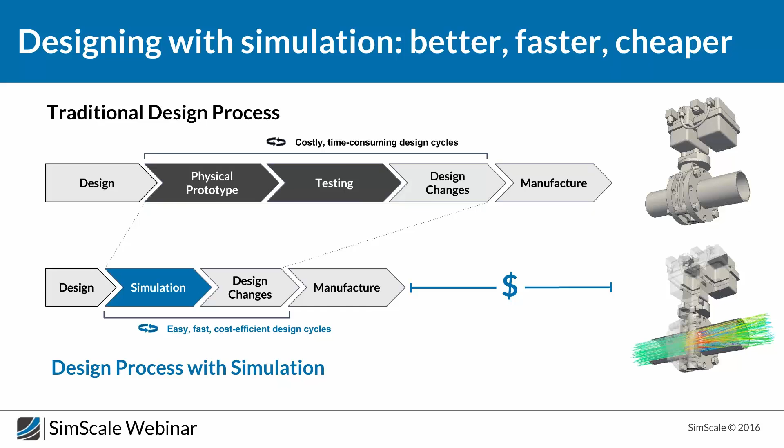So you now know the importance of using simulation, but why should you use SimScale for this? There are three important things that make SimScale a good choice: the first is accessibility, the second is cost efficiency, and the last is availability for everyone.

For accessibility, you don't need high-performance RAM, a graphics card, or any other special hardware, or even a big software installation in order to perform a simulation. Commercial software usually requires hardware or software installation, but you don't need any of that for SimScale. You just need a PC or laptop with a browser installed, and then you're good to go. You can perform high-performance computing on our cloud-based platform. All you need is an interesting idea, a CAD model, and basic knowledge of how to set up a simulation, and we can help you get through that.

Once you have an interesting idea, you can post it in the forum, and we can help you set up the simulation to get some interesting results.

The second point is cost efficiency. SimScale usage is basically free. Anyone can sign up to SimScale and start simulating for free. We have a concept of public and private projects. Public projects are accessible to everybody, so if you're a free user and sign up, you get access to all the free public projects. If your project is private, only you can see it and no one else can access it. So in that way, you can use everything for free.

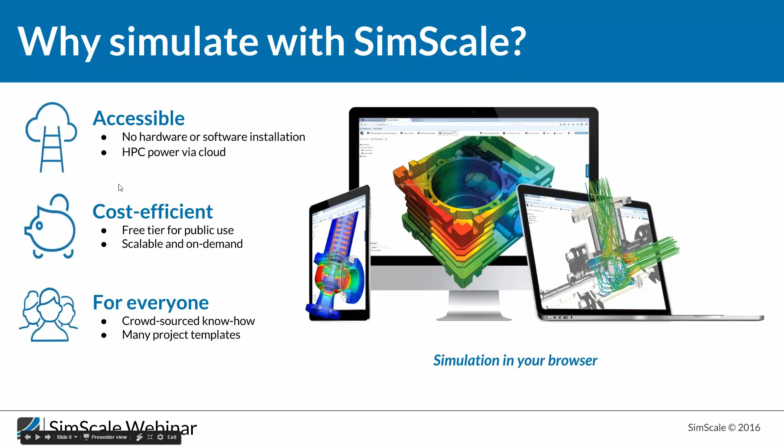And now the types of simulations: we have fluid flow simulation. So basically we have the different types in them: incompressible, compressible, multi-phase simulations, scalar species, and the one which is our focus today, the convective heat transfer, which is the buoyancy driven flow. In this case, we only have the fluid domain and try to simulate something on this fluid.

The second one would be the conjugate heat transfer, which has solid as well as fluid domains present. So in principle, you can simulate the interaction between the solid and the fluid domains. This is an advantage of using the conjugate heat transfer simulation. And there are many other advanced applications, say rotating machinery, porous media. In general, any of these fluid analysis types can be coupled with the advanced applications.

So in principle, you can use incompressible flow types with rotating machinery, porous media, and so on, say multi-phase with a 6 degree of freedom motion in the case of a boat floating. So you have air and water in a multi-phase simulation, and then you give a 6 degree of freedom for the boat. So it's easy to simulate, and all our CFD simulations are based on OpenFOAM and SU2 codes. Both of these are open source codes, and we use them to simulate the fluid flow analysis.

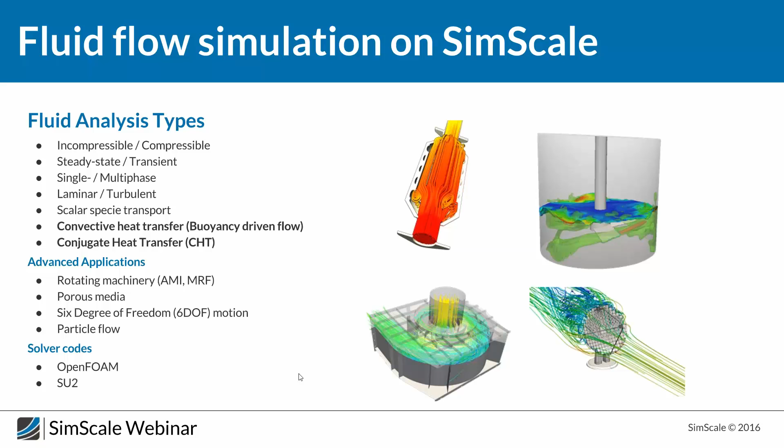And in the structural mechanics field, we have again various analysis types: static, dynamic, frequency, modal, and so on. But our interest today would be thermomechanics, which has heat transfer and uncoupled thermomechanical simulations. In heat transfer simulations, the temperature changes in the solid due to any heat transfer changes, but uncoupled also includes stresses due to any pressure loads and so on. So it includes the stresses induced in the solid due to both heat transfer and pressure loads.

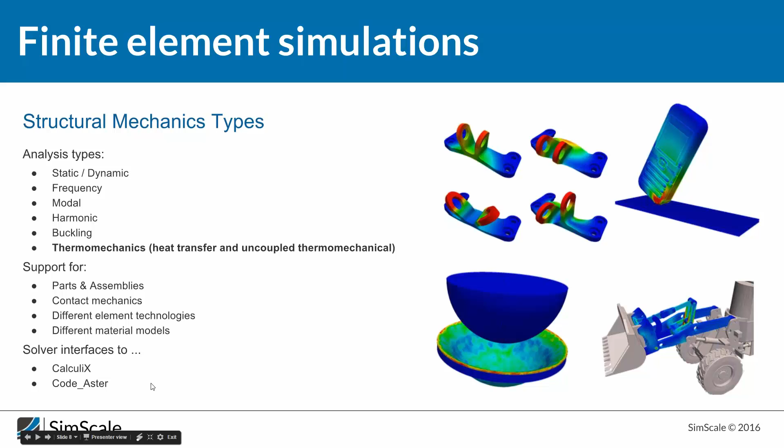And the structural mechanics solver supports all of these, contact mechanics, parts and assemblies, and so on, and we use CalculiX and Code_Aster as the solvers. There are other capabilities as well using SimScale, like discrete particles and acoustics, but these are not our concern for the day, so they might be useful for you if you would like to simulate any other cases.

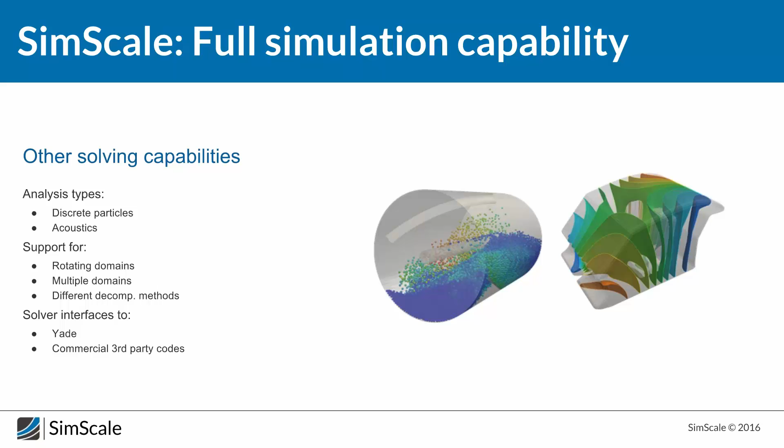Okay, now after having a short introduction about SimScale, let's dive into the topic. There are three basic heat transfer phenomena. As I told you earlier, they are conduction, convection, and radiation. To start with conduction: the term is defined for heat transfer between substances which are in contact. So if there are two bodies in contact, then conduction comes into play. Or it can even be a single solid which has a different potential, say one end at a higher temperature and the other at a lower temperature. So heat conducts from the high end to the low end.

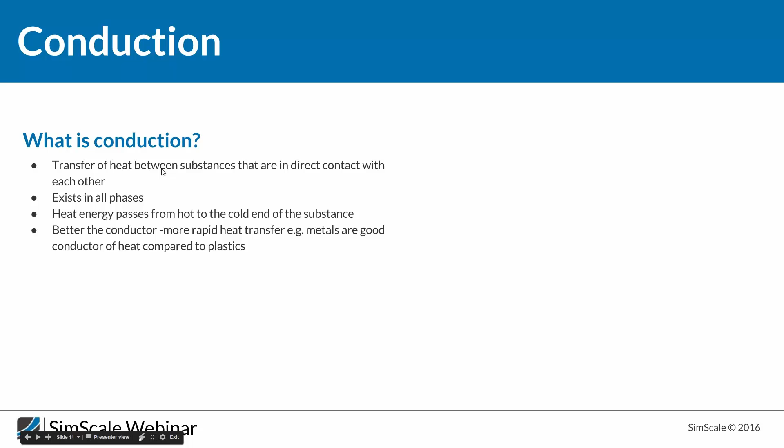This is predominant in solids, comparatively less seen in liquids, and seen least in gases. It exists in all the phases, but it is least existent in gases. This takes place essentially because of vibration in particles. In solids the particles are tightly packed, so when there is vibration, it gets transferred to the next particle. But gases are loosely packed, so even if you have a vibration, it doesn't affect the surrounding particles so easily. That is why the conduction effect is comparatively less in gases than in solids.

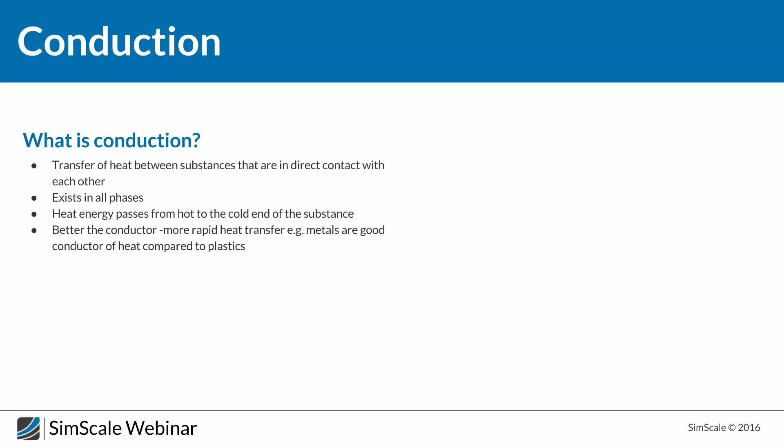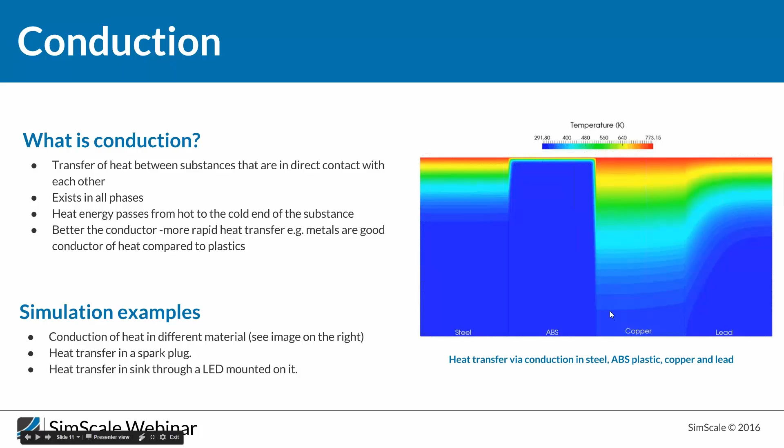And this is an example of conduction using simulations. Basically you have the heat transfer in a spark plug in an automobile. Heat is transferred from one end to the other because one end is always heated when the vehicle is running. And then you have heat transfer in a heat sink through an LED. And this is just the test case which I'm going to show you today. We are heating the top and the bottom end is kept at room temperature. So for different materials, how does heat transfer take place? This is a simple example.

And next we go to convection. Convection is one where the heat transfer is achieved by particle movement. It's a characteristic of fluids, so essentially it's liquids and gases. I would say a typical example of this is in winter season, you feel cold because of convection. So the air around you removes the heat from your body. So this is a simple example of convection, and this is done naturally.

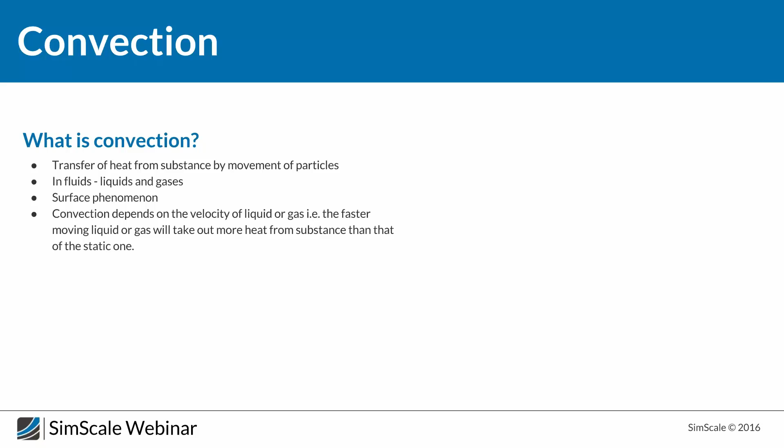In principle, you can get the required heat transfer or temperature if you artificially or intentionally blow air over something. So I can just show an example. So in this case, it's a data center. Obviously, this is a much reduced model, so a real data center would be much more complicated. We just show you how a convection simulation works in a data center.

So when air flows over here and you try to blow air into the domain with a particular velocity, and then you have heat in these surfaces. So these are the heated surfaces because of the server vents being heated. So the air which comes in, cold air which comes in, actually takes away the heat from the surfaces and goes via the outlet. So you can control the amount of heat being taken from the surface using the velocity.

So this is, as I told you, a case of forced convection, which can be used for various heat transfer applications. And even in this case, the heat transfer is directly proportional to the difference in the temperature. So here it is the temperature difference between the surface and the ambient. So the surface temperature minus the ambient temperature is proportional to how much heat transfer would take place.

Another typical example would be room heating during winter. So you turn on the heater and the hot air tends to move up, and this is one other example of convection in a room.

This is evident from the formulation of radiation. In the previous two cases, the heat transfer was directly proportional to the temperature difference. But in case of radiation, the radiated power is proportional to the difference between the fourth power of temperature. So you have, say, something like this. This is a simple case of radiation. I would explain this later because this is as well our trial case. I would explain the significance of the results later,

but you know that this is a hot surface and this is the ambient. So the temperature at the hot surface to the power 4 minus the temperature of the ambient to the power 4. So that makes a huge difference since it is to the power 4. So when the difference between the surface and the ambient is high, the difference is going to be very high. So that is why this is most evident at higher temperatures. And there are various examples of it. So when you have a highly heated plate, radiation takes place in it.

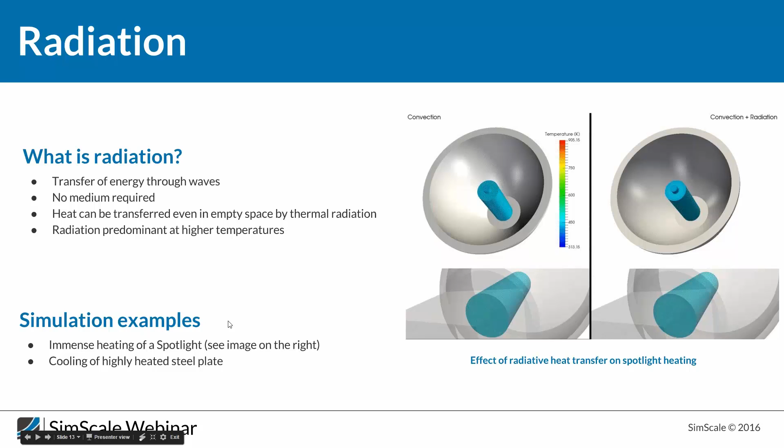Now, the general thermal simulation types. So we assume a simple case, say a flow through a pipe or a rectangular cantilever beam. So one for a fluid simulation and one for a structural simulation case. So if we know the dimensions of all of them, it is possible to find analytical solutions using the partial differential equation. So we have the simple geometry, we use the simple formulae and then try to derive the results. What is the bending moment, how the flow would be, and so on.

But what if we have a complex geometry? In this case, it would be hard to use our usual formulation. So we discretize the domain into small geometrical shapes and then try to apply these governing equations for each of the subdomains. This process is called meshing or discretization. So we are dealing with thermal simulations, which are structural as well as fluid, and we use two different approaches for this. One is called the finite element approach and one is called the finite volume approach. Now we would have a short discussion about what each of them are.

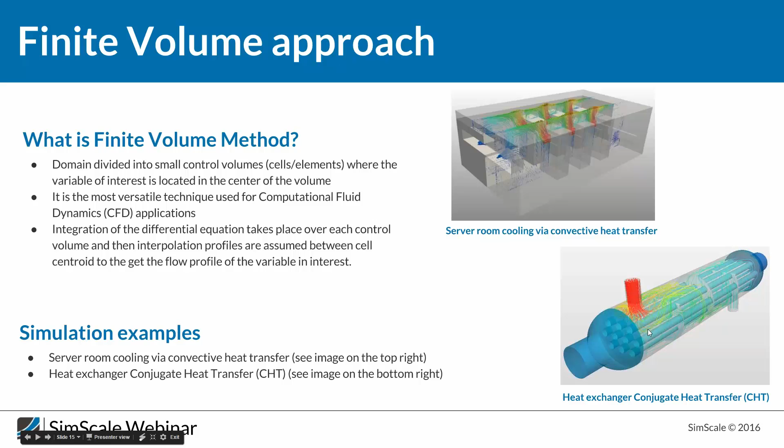And this principle is usually applied in CFD applications. And interpolation between different cells takes place at the centroid of the cell. So this interpolation is required to find the solution for the entire flow domain. And as I told you, it is used in CFD applications. So in convection problems or CHT problems, we use this finite volume approach.

And the next one is the finite element approach. So in this case, again, the domain is divided into smaller volumes, but the variable of interest is located in the nodes of the volume. Nodes are the corner points of each cell. So this is a tetrahedral mesh, so for every small cell there are 4 corners. So all values such as stress, displacement, everything is stored at all corners of the cells, and these are used for interpolation between the nodes, and they are most commonly used in structural mechanics applications.

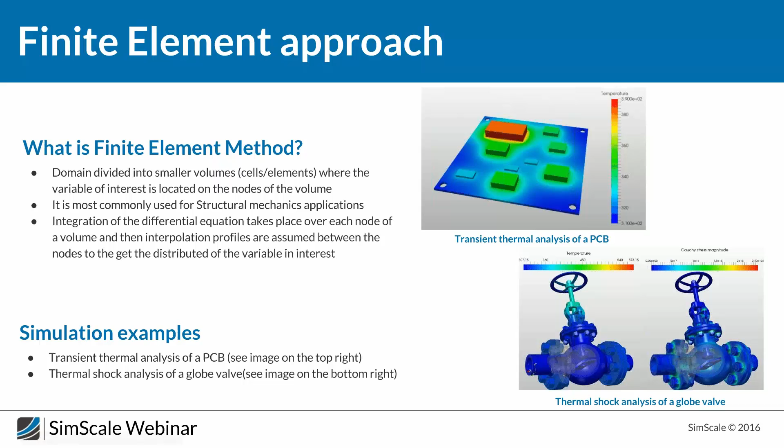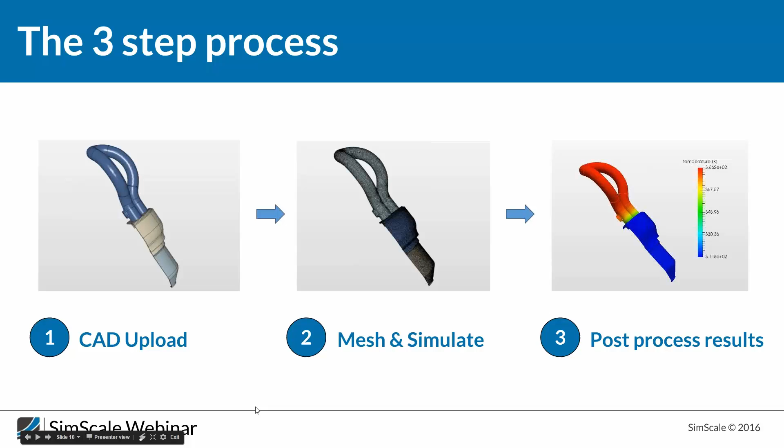So now, using the SimScale platform to simulate, as it says, it's a three-step process: you upload the CAD model, then you mesh and simulate it, and finally you post-process the results. From the basic overview it looks simple, but let's see how this works.

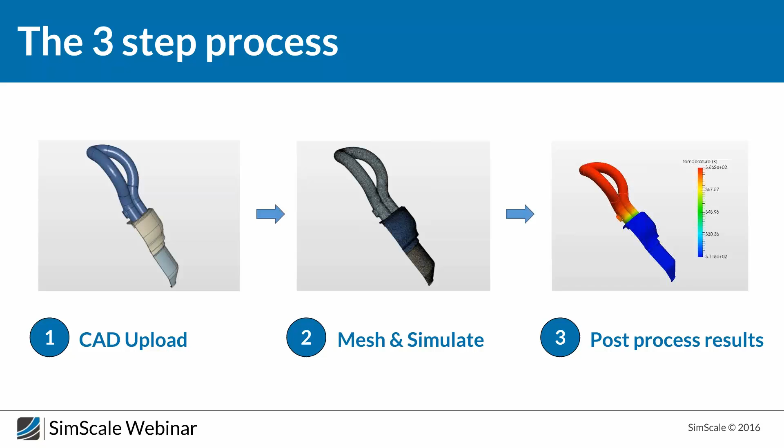So we have 4 case studies. The first 3 are just for study purposes, and the fourth one is a real world case. The first one is with just conduction. The second case is with convection as well as radiation, to show the difference between convection and radiation. And the third one has a spotlight heating. A spotlight is a lamp, so it is being heated, and what if it has only convection, and what if it has convection as well as radiation? So how does it work?

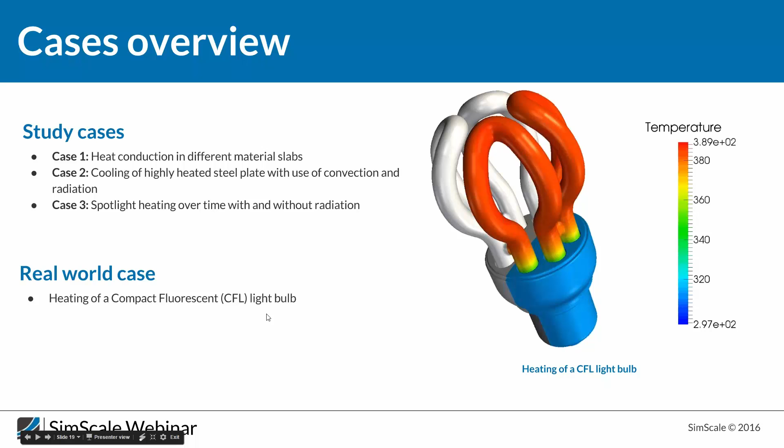And the real world case is a CFL, the bulb, and in this case we only take convection into consideration, and probably conduction between these two. So we quickly go through a live demo on the platform.

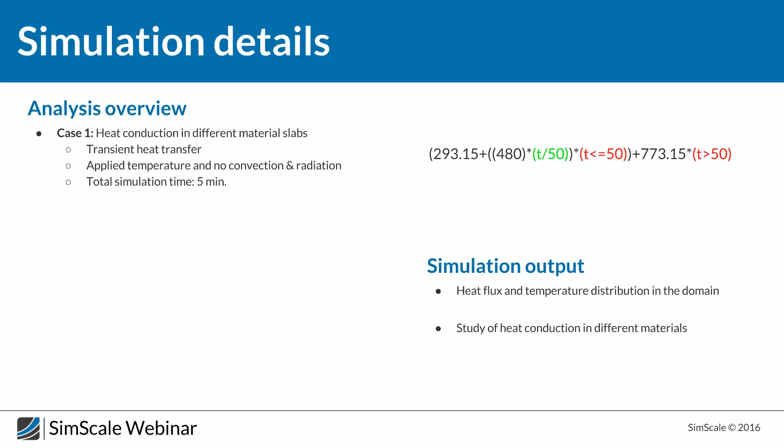So the first case is just conduction, which is a transient heat transfer analysis, and I'll be telling you what a transient analysis means. We apply temperature and no convection or radiation at all, so it's just conduction here. We simulate it for a total of 5 minutes physical time. The output we expect is the temperature distribution in the domain and the heat conduction in different materials.

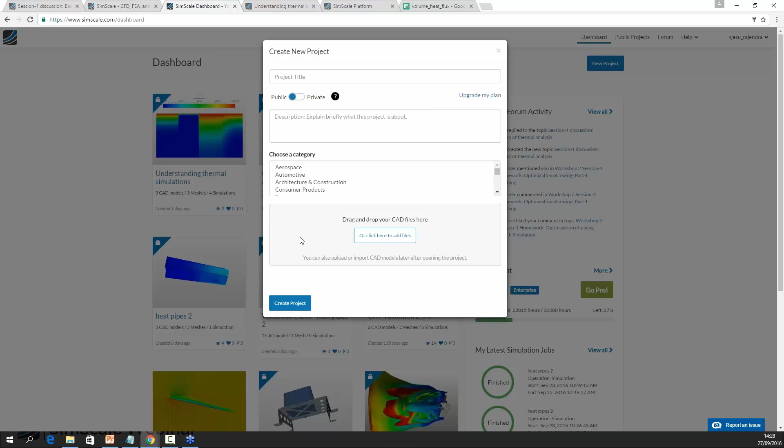Now this is what I mentioned at the beginning of the session, having a public or private project. You can have a private project only if you are a customer of SimScale. Otherwise you can create a public project. In this case, I already have my projects, so I'm just going into them. Once you click it, you have the project open. You have the project overview window, and then just click to open it.

Okay, so now I'm going to show you the example of conduction, which is multiple slabs. So here we have 4 slabs. We have 4 because we want to assume different materials for each slab and analyze how conduction takes place.

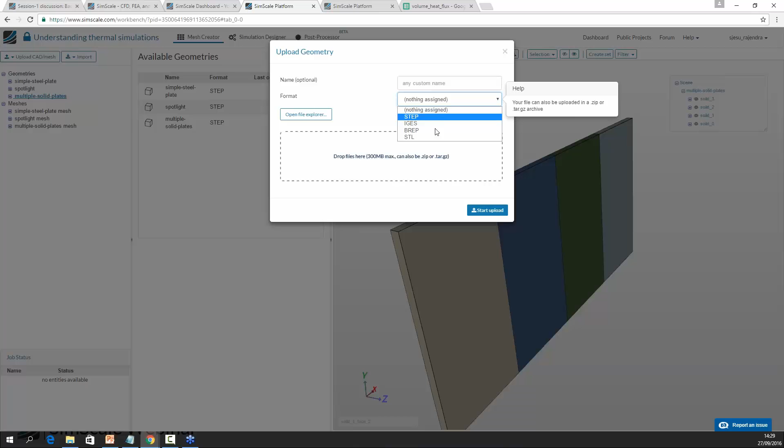So this model was done using a CAD software, and you can either import the model in any of these 4 formats into the platform, or you can also use the import from Onshape. Onshape is an online CAD software, just like SimScale is for simulations. So you can log in here, create a geometry, and then directly import it from Onshape.

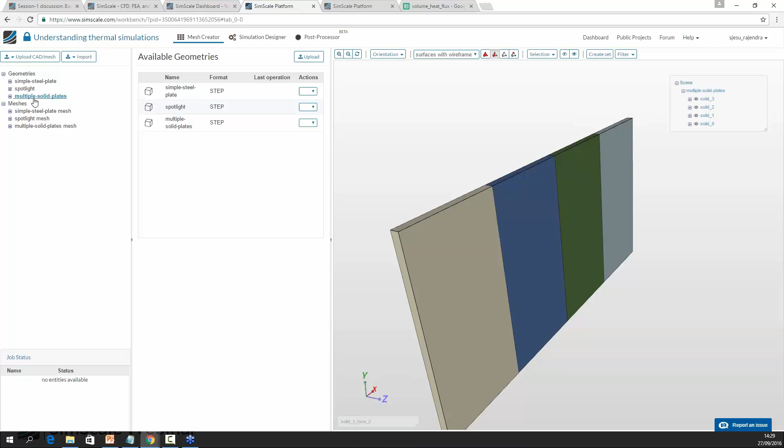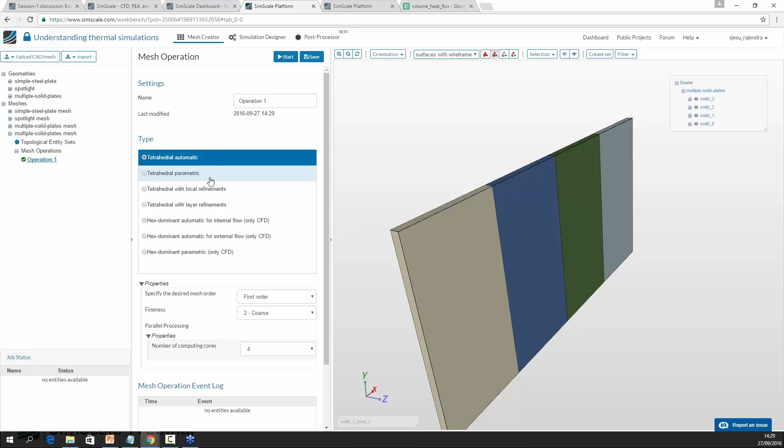So to start with a mesh, select the geometry which you want to mesh and click on new mesh. So right now we have only 3 meshes here which are already created. So I just want to show a demo of how this is being done. So once you click on that, you have a 4th one created, and you can select any of these mesh types, and you can go through the documentation as to how you can choose among these. So for this particular case, we use a tetrahedral parametric mesh.

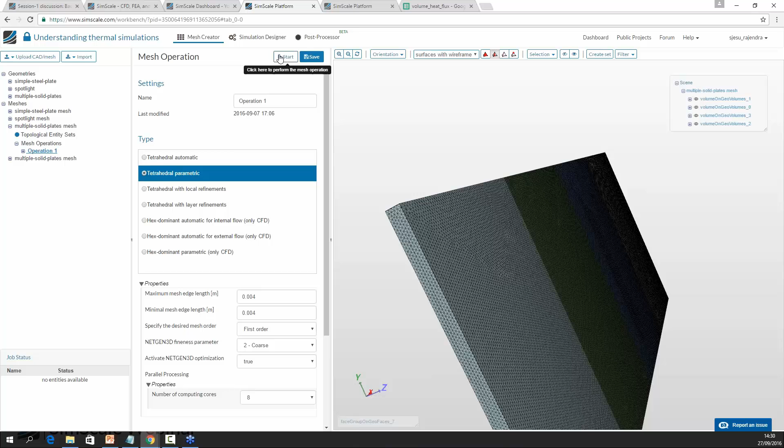So after meshing, it looks like this. So we discretize into small domains. In this case, we use something called a parametric mesh, which is kind of a manual mesh. We try to define the edge lengths here so that we control how many cells we want or the length of the edge which is required. And then you just mention the values and click on start to start the operation. And this would not take long, probably less than 5 minutes to generate this mesh.

So once this mesh is generated, now you can go to the simulation designer. So in SimScale, there is one thing which you have to remember. As simple as that, it's always either left to right or top to bottom. So on the top tabs, you go from mesh creator. Once you're done with the mesh creator, go to simulation designer. Once you're done with the simulation designer, then to post processor. And here top to bottom, so from geometry to mesh, and even in mesh, you go one by one.

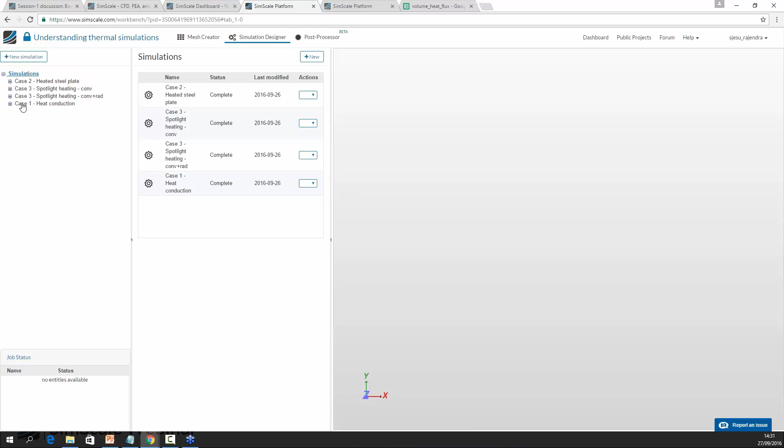So here you don't have many options, but when we switch to the simulation designer tab, you have many options, and you can just go from top to bottom, step by step, in order to set up the simulation, and it's quite easy for you to understand. Now, going into the simulation designer tab. So this is our case for conduction. In order to create a new simulation, click on new simulation and then choose the required analysis type.

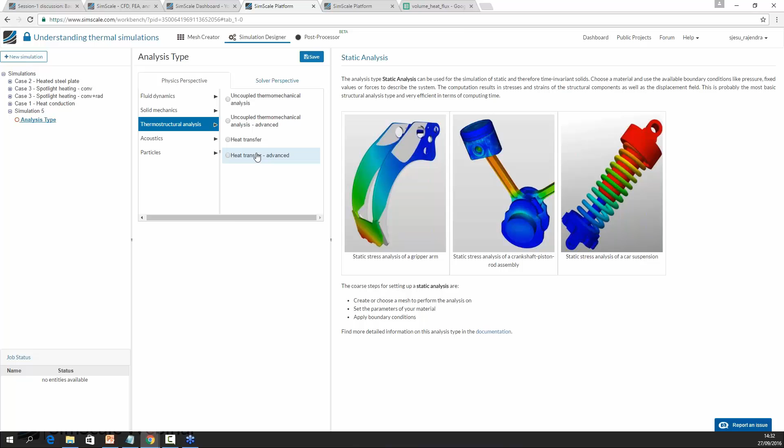In this case, we will be doing a thermostructural analysis, so you can use either one of these. And for this particular heat conduction application, I'm going to use Heat Transfer Advanced. Heat Transfer Advanced allows us to use something called manual time stepping, which I'll tell you about at the end of the simulation setup. So that's the main reason why we use this advanced solver. But for the rest of the simulations, we'll use the regular heat transfer analysis type, because auto time stepping would be sufficient.

So once you press this and then click the save button, as discussed in the problem statement, it is going to be a transient heat transfer analysis. So what is a transient heat transfer analysis? If you want a time dependent solution, then you go for transient analysis. A steady state analysis gives you the final solution at, say, infinite time. So after all the heat transfer takes place, what is the final temperature distribution in the domain? That you can see from the steady state solver. But if you would like to know how the temperature changes as time progresses, then you go with transient simulation.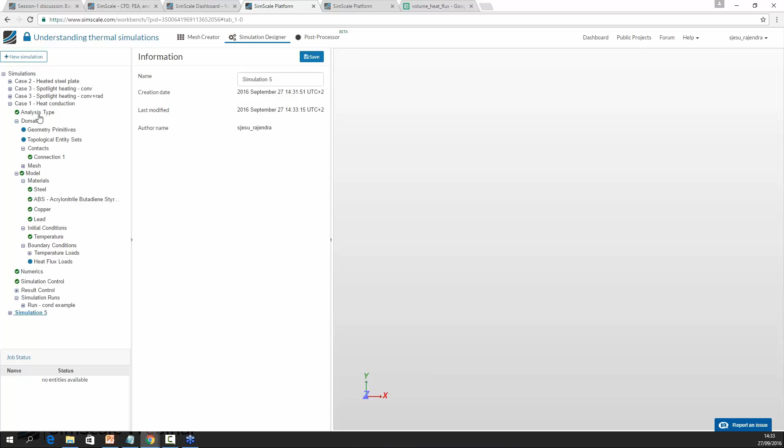And then once you click the save button, the simulation tree is automatically generated. In this simulation tree, the red buttons are mandatory fields, and the green ones are successfully assigned. If it's a blue one, it's an optional field. You can leave it empty and it doesn't matter, either way your simulation would run successfully. We have already set up the simulation, so I'll show you a demo on this one. As I told you earlier, it's heat transfer advanced and transient type. And then we go to domain.

So domain, one advantage with SimScale is that I told you we'll be doing three types of analysis, but you can have all the three types in a single project. So you have the geometry of all the three and the mesh of all the three in a single project. And then you can even have the simulation of all the three under a single project. So you can have multiple simulations, which are completely different types, completely different meshes.

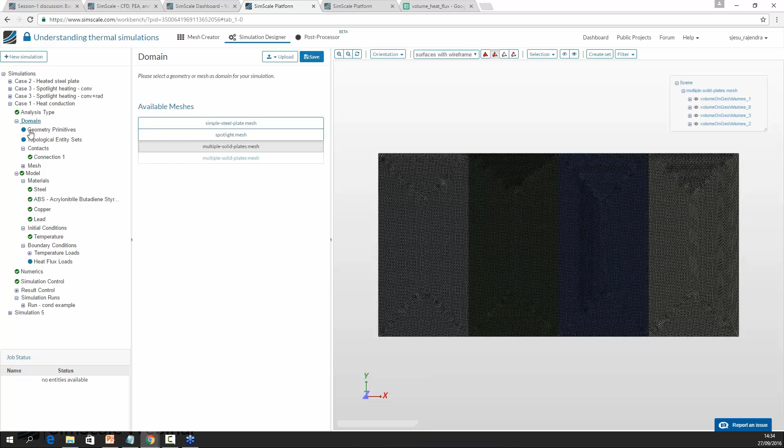So for this corresponding simulation, you assign the mesh. So in this case, it is going to be the multiple solid plate mesh. And then it is up to us to define the topological entities. This is an important aspect if you would like to group your entities for assignment. Say you have 4-5 surfaces on which you collectively have to give a condition.

Then you actually click those surfaces and then select new from selection and you give it a name and it automatically appears here. So when you go for any assignments later on, you just have to select this and then give the condition, and all of these faces are automatically being assigned with that condition. So that's the advantage of using a topological entity set.

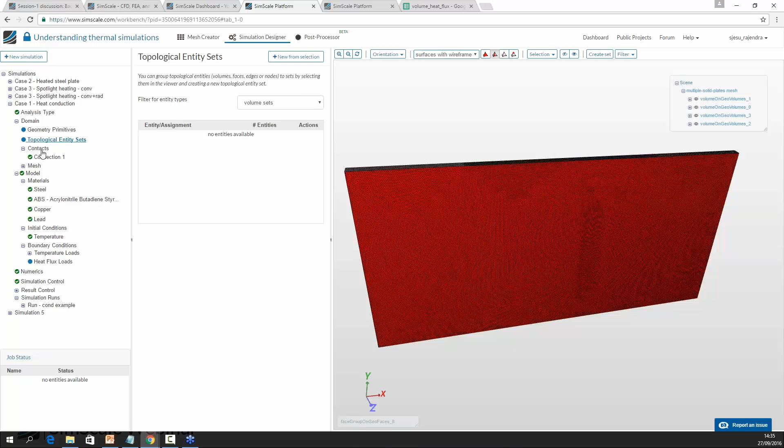So contacts in this case are essential because we have 4 different solids. As you can see here, they are completely different solids, so we need to tell the solver that there is a connection between each of them. So we define something called a bonded contact. When you select them, you cannot see them right now because it is this surface which is in between them. So what you can do is you can go to selection and click on isolate.

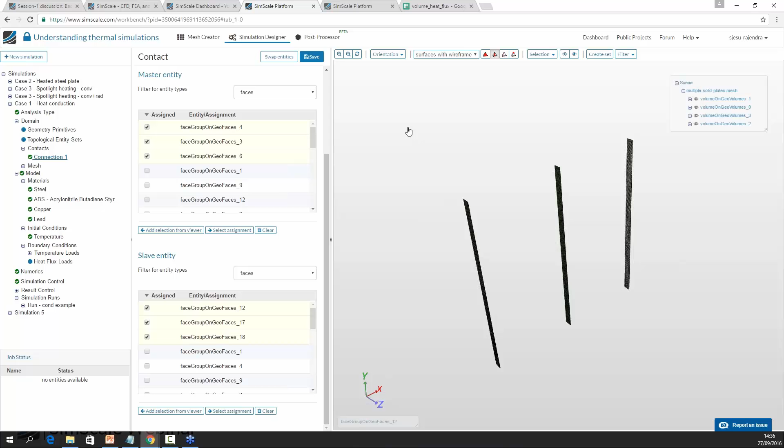So here you can see the master entities, and again you can see the slave entities. In this case it is going to be the same. You wouldn't see the difference, but in principle they belong to different solids. So previous time the master entity was from the face of this solid and the slave entity was a face of this solid. So now you can see the difference.

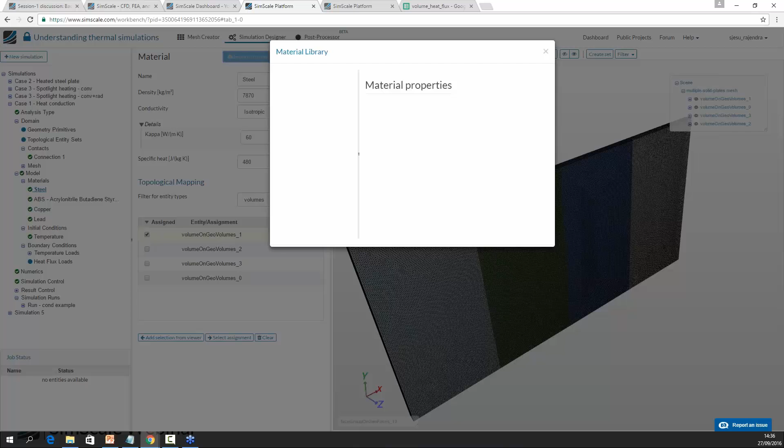And then you now set up the materials. So first you define a steel. You already have a material library from which you can import the material, a list of materials. So you can just select the material, click save, and you automatically have it here, and then you assign it to any particular volume here. So in this case, steel is assigned to this volume, the first one,

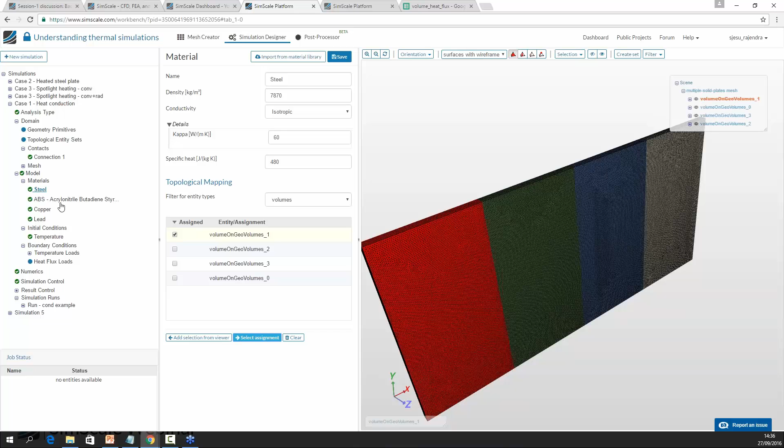and you have acrylonitrile butadiene styrene. So this is a plastic material, and this is being assigned to the second solid. Copper is being assigned to the third one, and lead to the fourth one. Each one has its own material properties, and the most important property for conduction would be here. The kappa would be the thermal conductivity, which is the important parameter for the conduction problem.

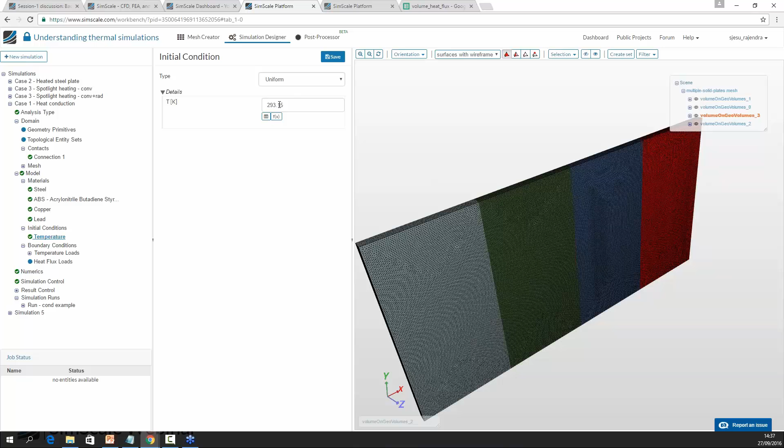So we define an initial temperature. As I told you earlier, you always go from top to bottom. It makes things much simpler and easier. Top to bottom. So now going to temperature, you define a room temperature of 20 degrees Celsius to the whole thing, just an assumption, and then you create boundary conditions. So here we say there is a temperature load on these faces, and the temperature load is given in terms of a function.

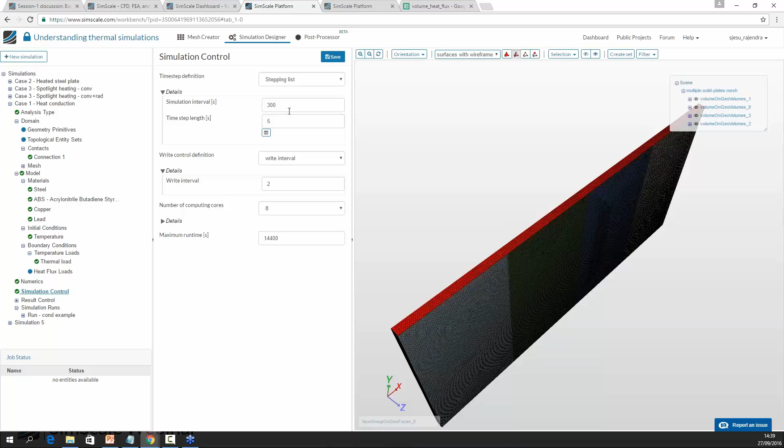And then here we use the stepping list, and this is why we actually used the advanced solver. So here we actually force this time interval, and that's the reason for using the advanced solver. And then you create a new simulation run. Once a run is created, you just select the run and click the start button, and it automatically starts running.

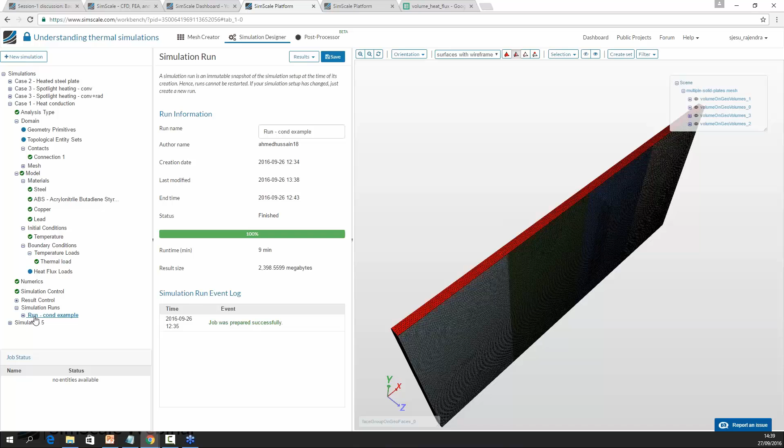Now we have to go for the next one, which is the post processor. If you want to get the result for the corresponding simulation run, you can just click here on post processor results. You are directly redirected to the solution field of that particular simulation run.

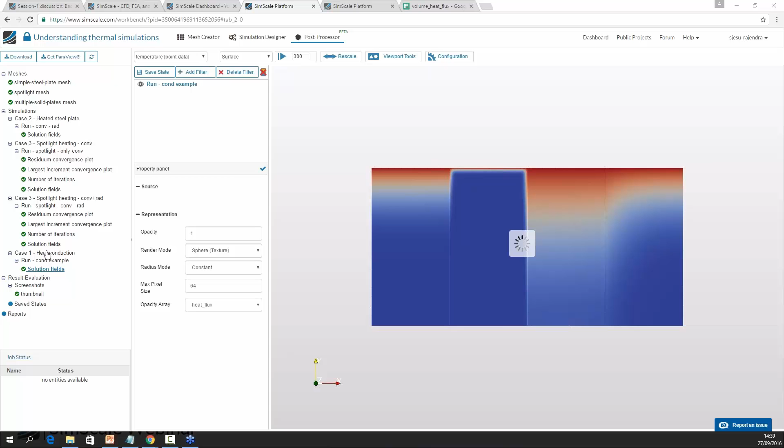So you can see all the simulations here. You have the possibility to view the mesh as well, and to save screenshots or saved states, so you can come back later again to view it. Here you can see the temperature distribution in the whole domain, and we would be discussing this later in the session.

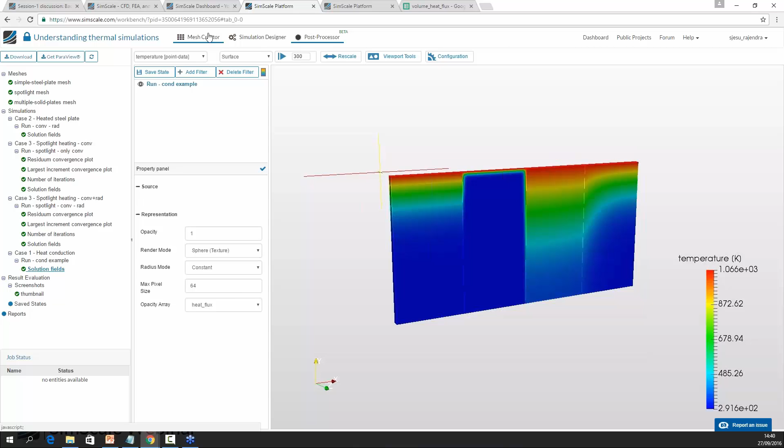Right now I would be showing you the subsequent convection as well as radiation models. So the second one would be convection and radiation. This is going to be a steady state analysis which involves convection as well as radiation, and since this is a steady state analysis, it doesn't really matter how much time you simulate it for, because you only get the end result, so it is just for 1 second.

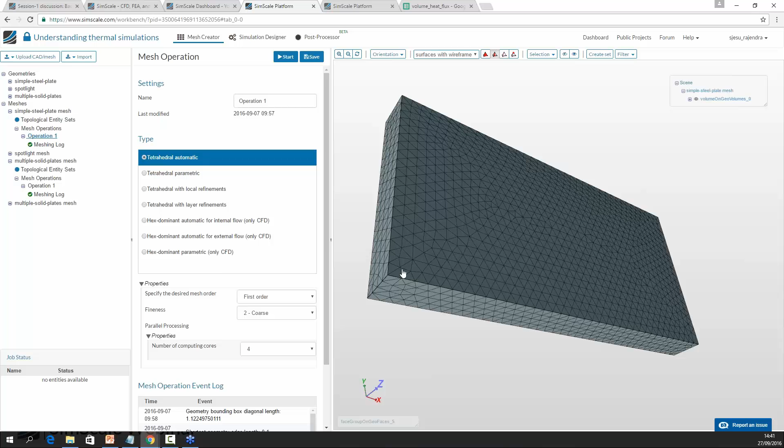In this case you have this, it's just a rectangular plate, and to mesh it we just use an automatic mesher. An automatic mesher, depending on the geometry, automatically calculates the edge length. Previously we used to give a value, but in this case it just calculates a value automatically and then meshes the domain. So now we go on to the simulation setup.

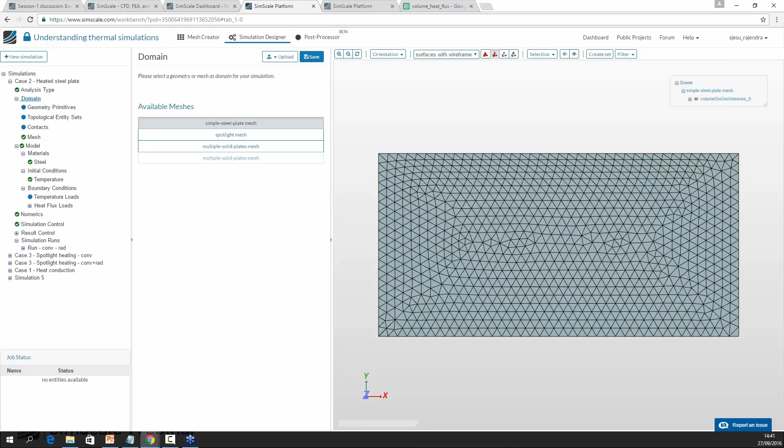The same thing as I told you why we use heat transfer. Here we don't have contacts because it's just one solid. We select the particular domain and then we assign steel material to it. The initial temperature is 30 degrees Celsius, which is 303 Kelvin.

And now comes the load part. So we say that we apply a 1000 watt load to the complete volume. So the volume dissipates a load of 1000 watts, and depending on the volume we give the value as this, 20,000 watts per meter cube.

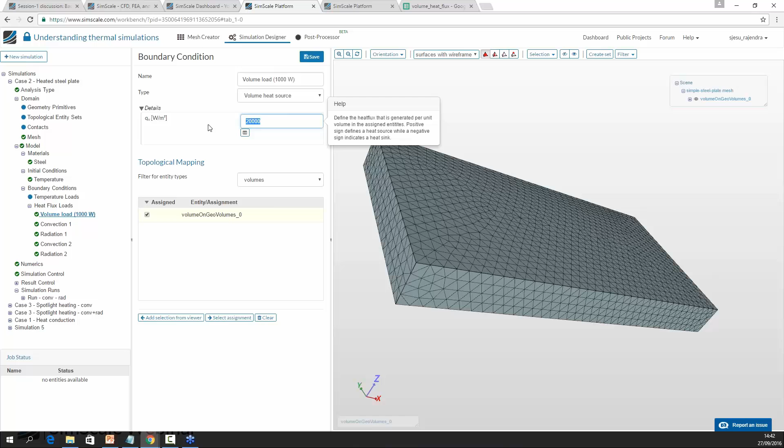So now we define a convection here, convection with a heat transfer coefficient. The characteristic of a convection simulation is a heat transfer coefficient. This decides how much heat transfer would take place. So this is one case. In the second convection we give a value of 50, just to see the difference as to how a 5 and a 50 surface reacts.

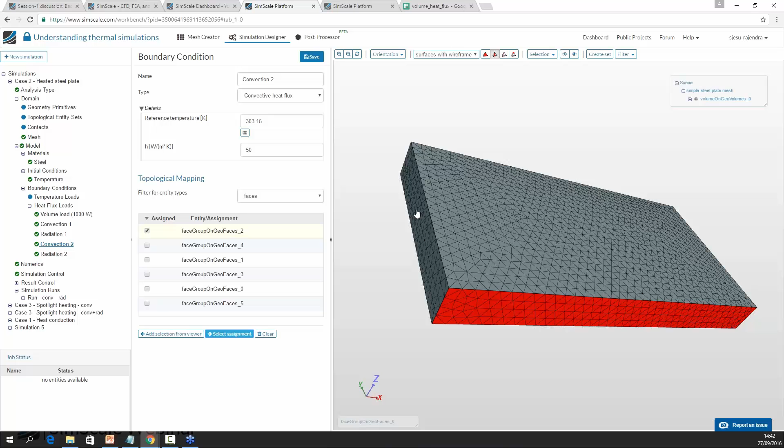On the other hand, we have radiation defined on the other two faces. Radiation with an emissivity of 0.9 and the other one with an emissivity of 0.1. So what is this thing called emissivity? It's a characteristic of radiation. If emissivity is equal to 1, it is called a black body, which can take up radiation completely or give out radiation completely. It's like it completely dissipates the heat. An emissivity of 0 reflects everything, it accepts nothing. For example, you can assume a shining surface - that's an example of an emissivity 0 surface. And for emissivity being 1, a completely black surface or a rough surface is a good example.

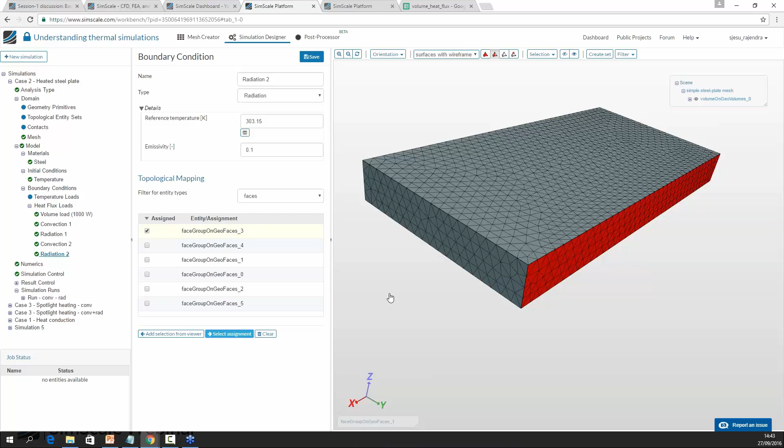So we define this case and create a new simulation as the previous one and then run this again. We would see the results of this as well at the end of the discussion.

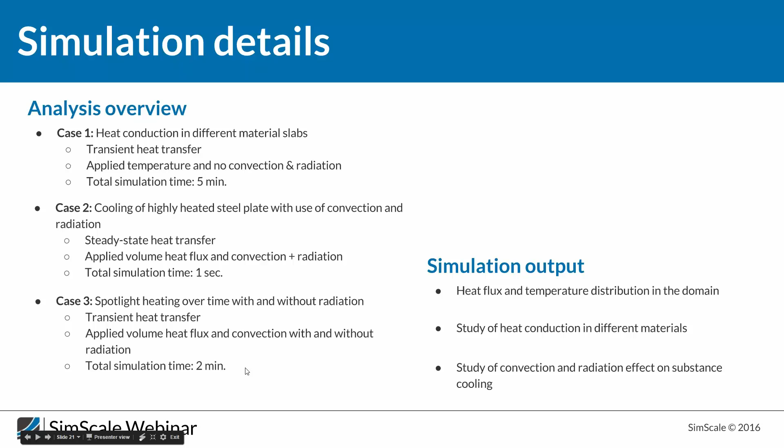And now we go to the third one, which is the case with radiation, like how radiation affects. This is also a transient heat transfer simulation run for a maximum time of 2 minutes, and a volume heat flux is applied to the body. So in this case, this is going to be the geometry. It's a light bulb where we have something over here which is circular, but then it's computationally expensive to include that and simulate, and it is of no physical relevance. So in principle, we only simulate this.

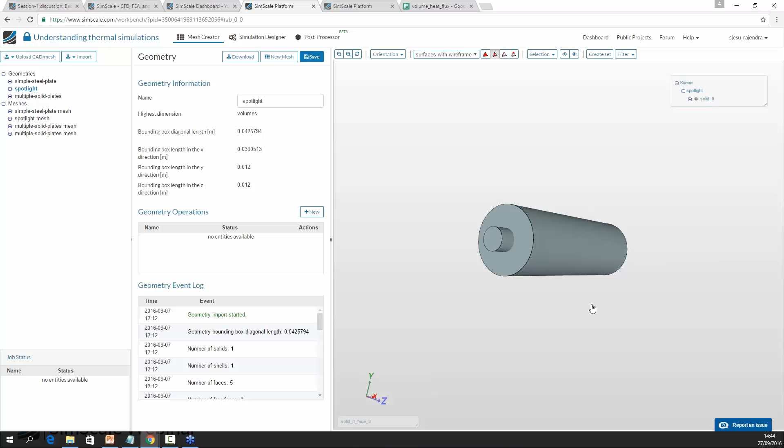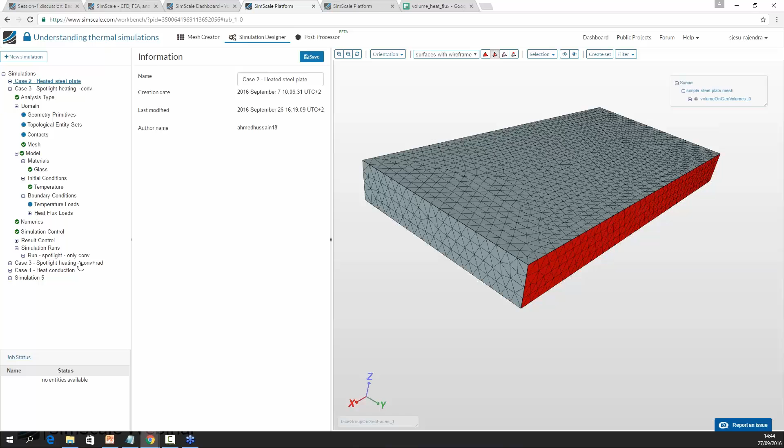And again, we create an auto mesh over this. Going back to the simulation: one case, we only define a convection over it. The next case, we define a convection and radiation over this one. So we choose the heat transfer analysis type to be transient. And now, since this is a light bulb, we define glass material to this one. Here comes the part - so we define a volume heat flux to this.

For transient simulations, keep in mind that this is kind of sensitive. If you directly give the maximum value to it, there's a possibility that the solver could crash. So what we do is we ramp the value. We run it for 2 minutes, but the first 10 seconds the heat rises slowly and then it's constant - so essentially in this region, it is going to be constant. But how do we do this? We just create a table where you have the time and the volume heat flux, and then save this as a CSV file, a comma separated value file, which can be uploaded here.

So only CSV files can be uploaded here. You can look into the documentation for more details on uploading a CSV file.

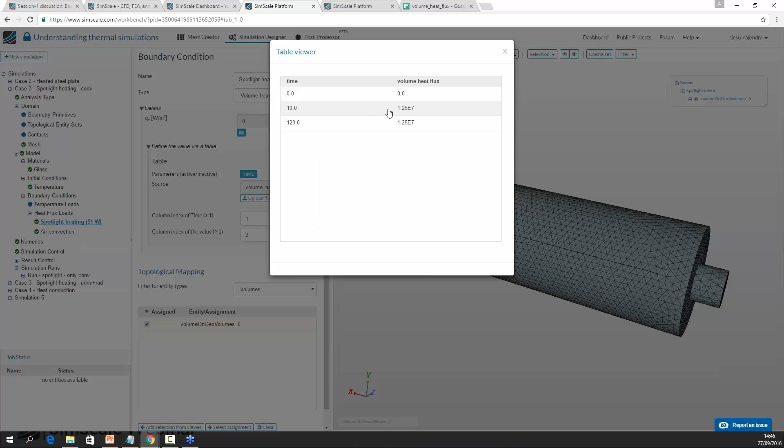So we give this value, which corresponds to a 51 watt power, and convection is defined in all the surfaces except this one, because this is connected to the other shining surface above it.

Now we simulate this case, and in the next case the only difference is that everything is going to be essentially the same, but we also have radiation defined on the same surface as convection. So we only have this difference.

And we now try to find the different solutions, and before that, the real world case as well. So now we consider a CFL, and this is a steady state heat transfer analysis with a volume heat flux defined, and since it is steady state, we only simulate it for 1 second.

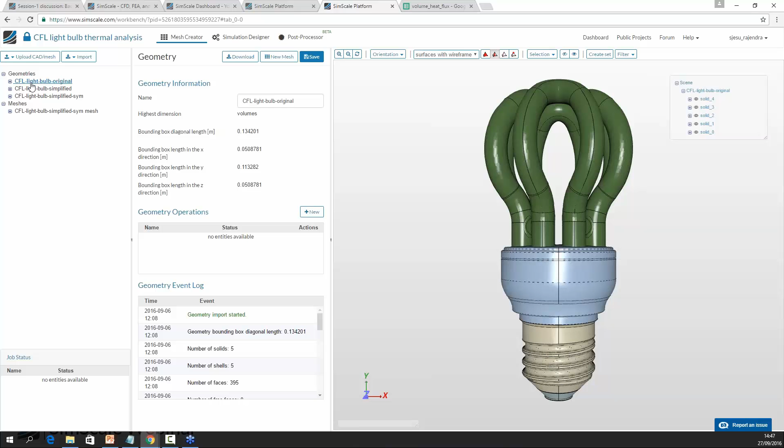So this is the original bulb, and the most important thing people should keep in mind is that simulation is kind of tricky. It's always best to break down things into simpler parts. If you have a very complex model with difficult or multiple boundary conditions and you get an error in the simulation, you really don't know where the error occurred. So what can be done is you simplify into small steps, or use a reduced model, and slowly increase the complexity step by step to get the final results. This way you can actually know where you're committing a mistake or where the error comes from. So in this case, this is the model.

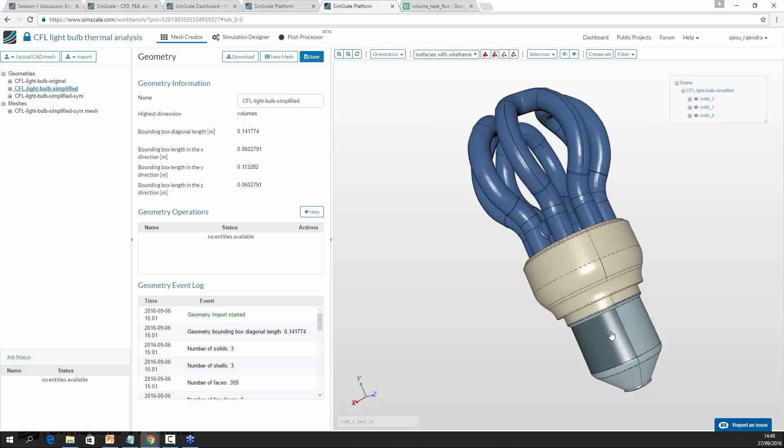This is a model from GrabCAD, from one of the users there. So now we simplify it. In the threads, I believe they don't contribute so much to the heat transfer, so we try to neglect them and simplify it. Another advantage is that we take advantage of symmetry, so since it's going to be the same everywhere, we only take 1/4 of this model and simulate this.

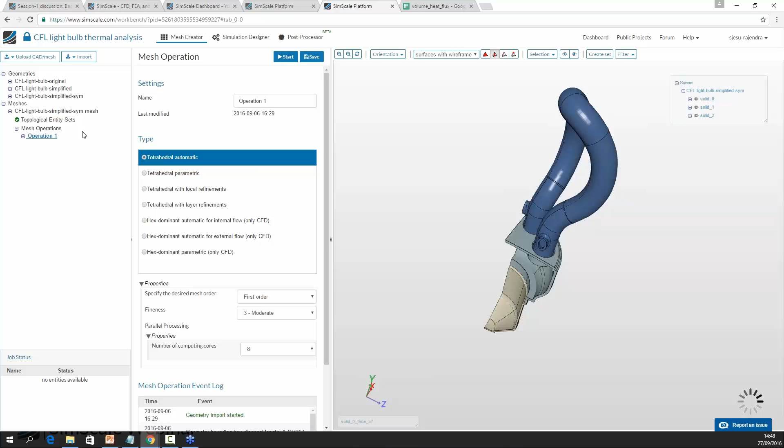So I again do automatic tetrahedral meshing. It looks like this. And to set up the simulation, it is again the heat transfer advanced solver.

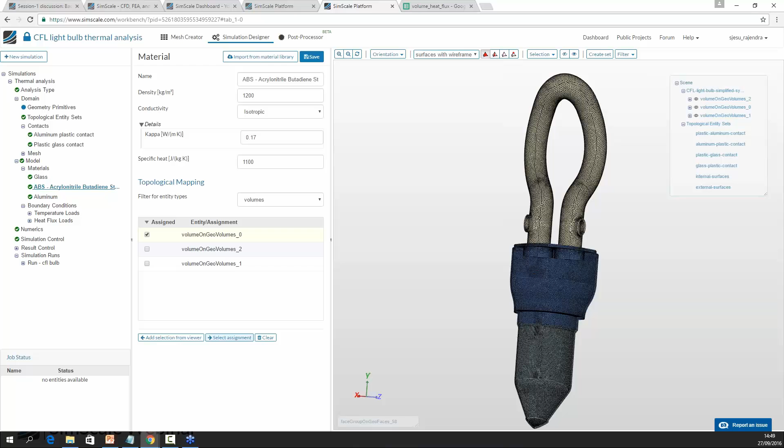In this case, since there are more than 2 materials, actually 3 materials, we define contacts. We assume the bottom to be aluminum and this to be plastic. So this is one contact, and the second contact would be between the plastic and the glass, so heat transfer takes place between them as well. We define glass, the plastic, and the aluminum.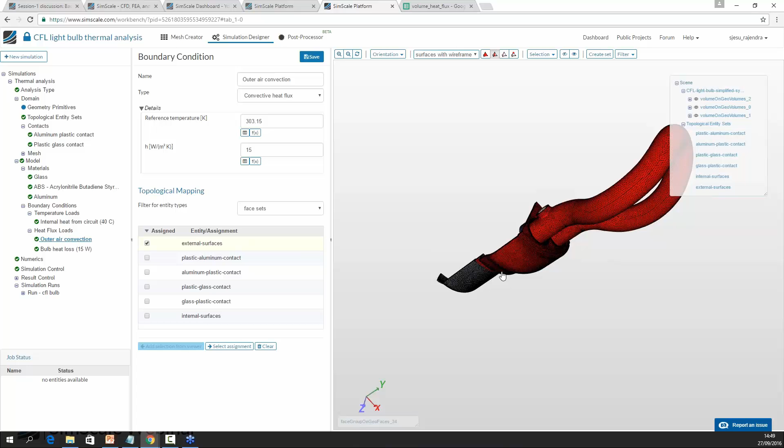So defining the boundary conditions, we give a temperature of 40 degrees to this one, and a convective heat flux where you expect it to get heated. The volume source is only in the glass, which is 15 watts. Now we try to simulate this and get the results out of them.

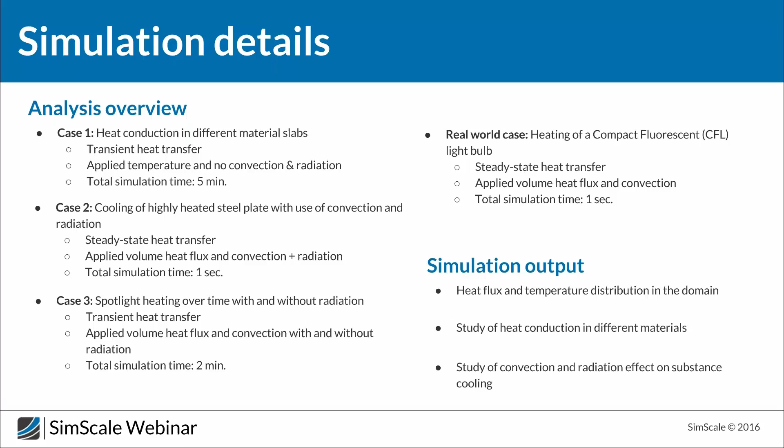This is the property of metals. Metals are actually good conductors, so the thermal conductivity value is high for metals. And even among metals, there are differences, in which copper has the highest value.

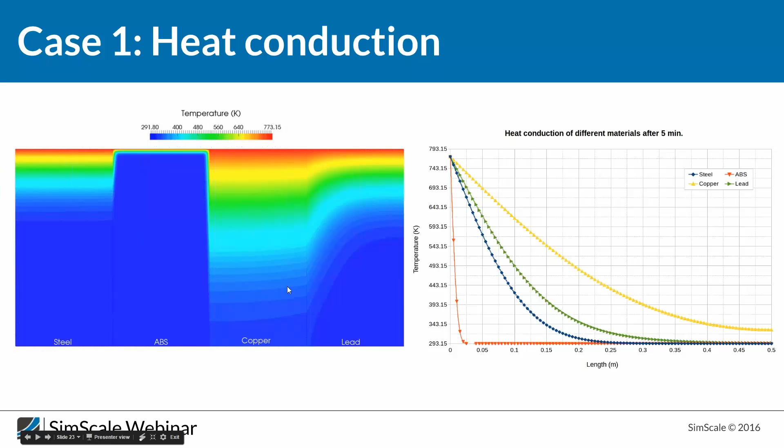So the contact definitions actually work well in this case. So now moving on to the next case.

The second case is where we defined convection on two faces and radiation on two faces. Comparing these two, this is lesser convection face, and comparing these two, this is lesser radiation face. So at the juncture of these two faces, you have a high temperature, and this is due to the dissipation being very less because of low convection and low radiation out of it. Whereas on the other side, this has high convection and high radiation, so heat is being dissipated really fast, and you see the temperature reduces in this area of the domain. So this essentially shows how convection and radiation could work.

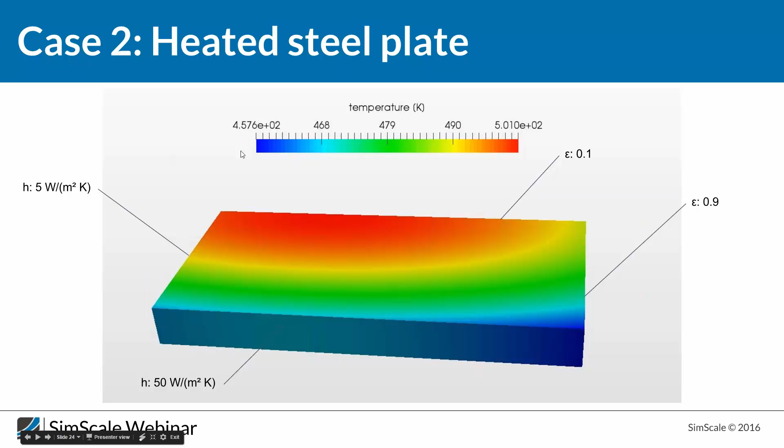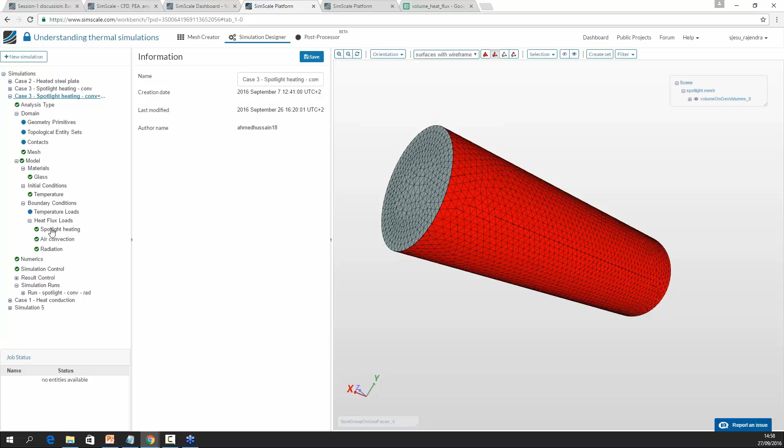Could you please go through the boundary conditions? Okay, so boundary conditions. This is a question from Zohair Said. I'm not sure which simulation you're referring to, so I'll take up one case, a case which has more boundary conditions in it, and quickly go through it. So, yeah, this one should be good.

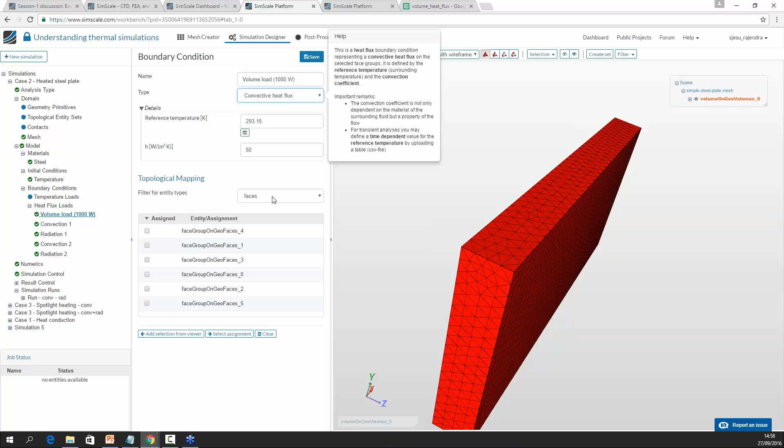So we define a boundary condition for any topological entity, so we define it for any volume. In principle, you can even define it to volume sets. If you change this, it is possible to give the heat boundary condition in any form. It can even be assigned on surfaces with an appropriate reference temperature, which is the ambient temperature in this case, and the heat transfer coefficient.

Here, to define this value of heat source, we calculate the volume of the whole solid, and then we want to define a 1000-watt load. So according to the volume and the power we have to apply, we calculate the watt per meter cube load, and that is being defined.

So this is for convection, and in case of radiation, the reference temperature is again the ambient temperature, and the emissivity is what I told you earlier with respect to the black body: emissivity 1 is a black body, and emissivity 0 actually does not accept or emit any radiation.

So I hope this answers it. If you have any further questions, you can just post it on the forum.

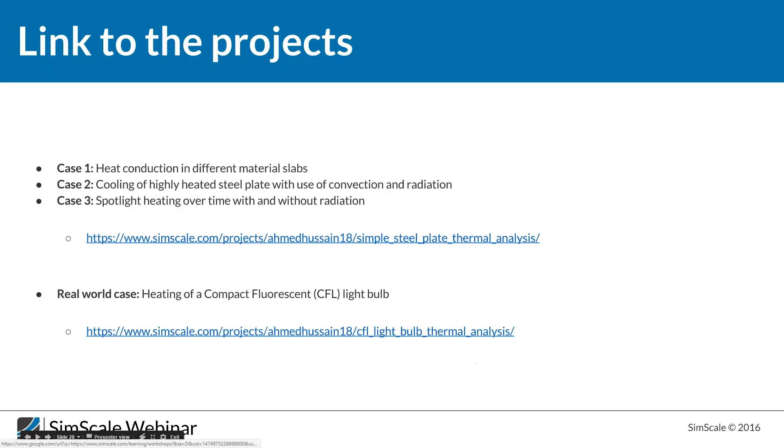Could you please repeat and explain the slide of finite volume method? It's a question from Alexandro. Okay, Alexandro, here we go. So in finite volume, essentially all simulations are calculated using subdomains. The entire geometry is divided into small domains; this process is called discretization. In this case, they are small control volumes.

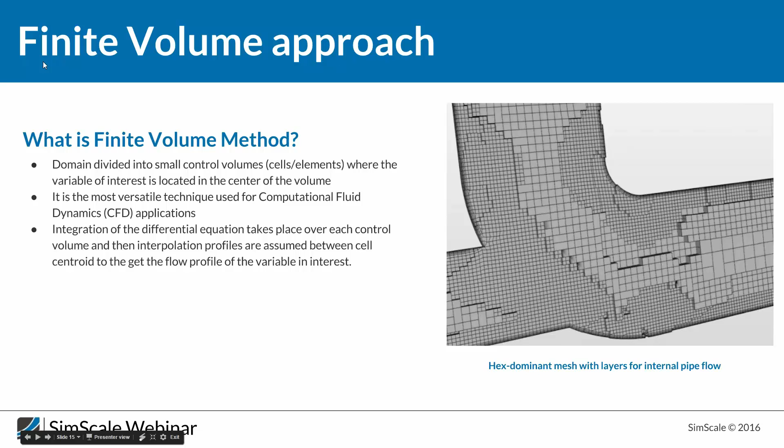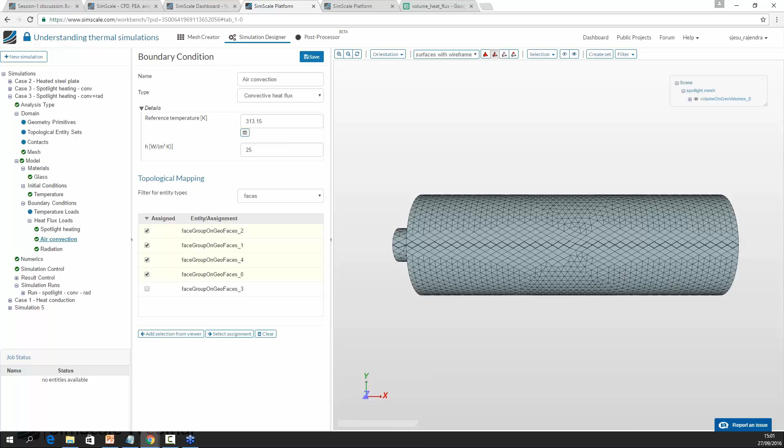Okay, could you go through convection plus radiation? Okay, so I believe you're referring to this case with convection plus radiation. Oh, sorry. So in this case, you define the convection on some particular surfaces and also radiation on the same surfaces. So as you can see from the results,

Okay, that's an interesting question. How accurate are the results for real-world applications? It's a question from Vivek Talapa. Thank you. We actually have not simulated this. We should probably take up a research paper on this and compare the results. That would be kind of a validation case.

So if you're interested, we can definitely try to do this. And if you would like to do this, you can post it on the forum, and we can definitely help you get this out. Okay, and I see no more questions coming up.